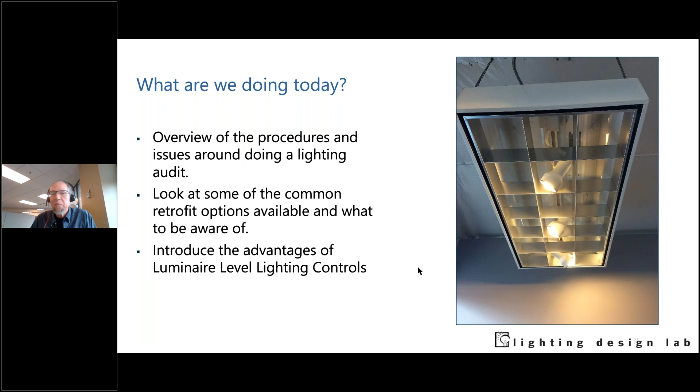All right, so we have our first little pop quiz, and I don't know, Katie, are you going to take over? Do you want me to? No, okay. I'm going to start that. Let's see. Launch. Okay. Eric, do you want to read the options? Yes, and just as an FYI, I don't see it on my screen. I see the green pop quiz, but I don't see the blue. But I think it should be the same.

So yeah, how many of you have done lots of audits and retrofits? Do lighting but want to know more about existing buildings? Are a contractor and want to know more about lighting? Are new to the field and want to know every aspect and thought this was a cooking class.

And we're gonna close it up. And I'm sharing it out, but you can't see the results, Eric? I can see them on a tiny little screen, so it looks. I'll go ahead and let you know. All right.

60% of our attendees currently do lighting, but want to know more about existing buildings. Great. 40% have done lots of audits and retrofits, so maybe we're going to get some good questions.

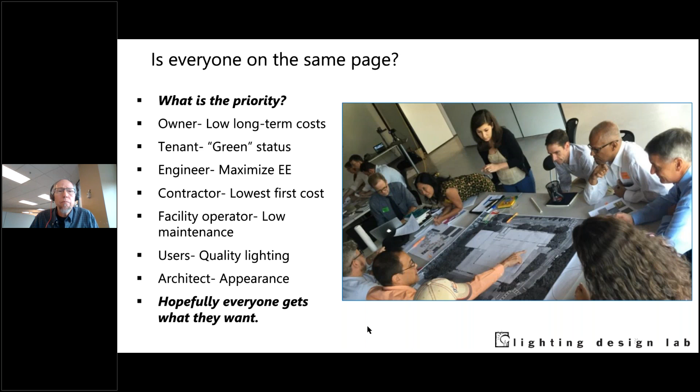So at the beginning of a project, it's always good to go out and do a preliminary survey of some kind. And often we'll get called in, someone's doing a retrofit of a building, and what we hear about first is the hardest part. So if we focused all our energy on what the client is reaching out for, we might think, oh my God, this is going to be an impossible project. But then you go out there and you realize 80% of it is pretty easy. There's just some areas that are going to be difficult. So you don't want to focus all of your effort on that right off the bat.

Another thing that we've seen is sometimes people say, oh, we have to change all the lighting. And maybe they want to say everything's got to be LED, just sort of arbitrarily. And we've seen this on some fairly new facilities, and they might have an area where, yeah, you can change pretty much everything to LED with no problem, but there's a couple spaces that are going to just be really

difficult to retrofit. One thing in particular I'm thinking about is some exterior lighting bollards. Pretty much nothing you could do to retrofit those effectively. So now you're tearing those out and putting in new ones, and that's like 2% of the project, if that. So maybe you say, well, look, let's do everything, and we'll just leave these until they're worn out.

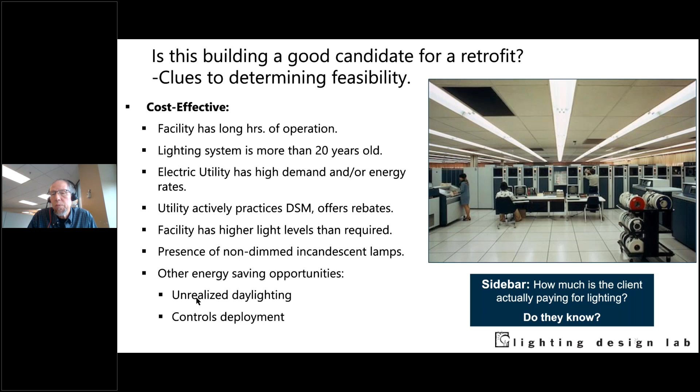Another thing that you want to look at is, are there any opportunities for daylighting? I've walked into spaces and seen skylights that were covered over. Or maybe they should have controls. Maybe people come into the space every hour or two, check some things, and then they go off and do something else. And just for convenience, they leave it lit in between those times. So sensors could be brought on.

Places where it might not be as cost effective: the facility has short hours of operation. We see this in theaters a lot, sometimes churches, where they'll have maybe the sanctuary or presentation space that uses very high wattage light sources, light fixtures, but they're really not on that much. So the wattage savings could be high, but the kilowatt hours would be fairly low on an annual basis.

It may be that it's already a green facility, and so there's not a lot to do. Or maybe it's been retrofitted recently. We see that people say, well, I want to convert to LED, but it was upgraded to modern T8s maybe within the last 10 years. So there'd be some savings, but not very much. Or maybe the energy rates are low. So there's any number of reasons where they could upgrade, they could retrofit, but there might not be a lot of cost savings.

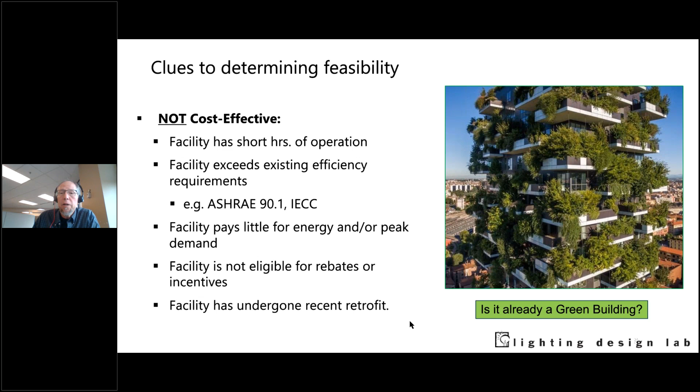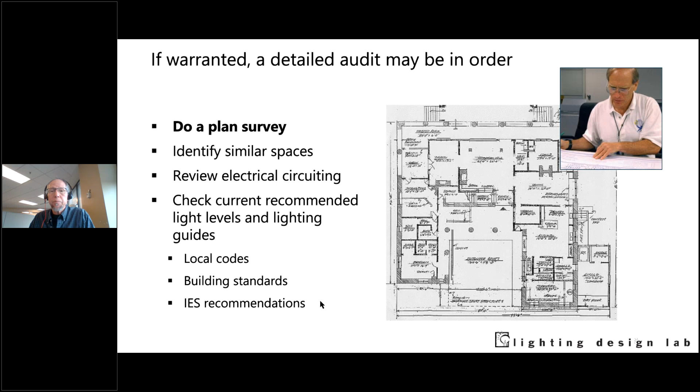Some things you might want to take with you when going out to look at a space: you might want to bring a light meter. I don't really put too much stock in light meters, but sometimes it's good to have them as a point of reference. We'll talk about it a little bit later. Some sort of measuring device, measuring tape, or laser - there's laser measure. One thing I've found is in bright spaces, a warehouse or a gymnasium during the day,

they're not always helpful, and if you're doing exterior during the day, they're almost useless because it's so bright out - you can't see the lasers pointing. So a measuring tape might be good to have with you, especially if you're doing exterior, maybe a 100-footer. How far is it between the poles? Notebooks or a tablet, tape recorder with transcription, camera with a zoom. We'll talk about that in some detail here in a minute. Binoculars can be handy for large spaces.

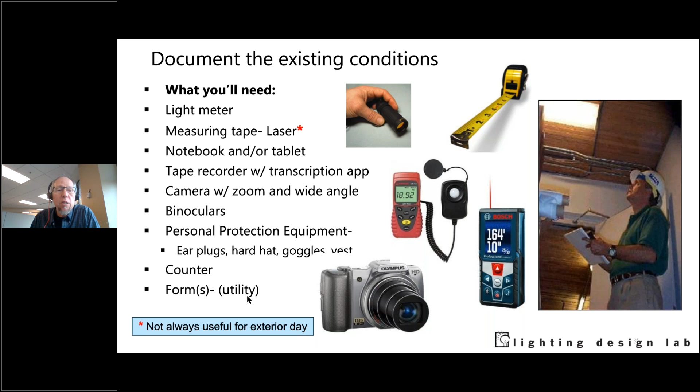Personal protective equipment, a counter so you can easily count and not forget how many lights there really are in that large warehouse or classroom. And then if they're looking for a utility rebate of some kind, it doesn't hurt to have the form with you, so you can get a sense of how that's going to need to be documented. So that's some things you might want to bring.

Then you want to go and document the lighting systems. So again, check light levels - existing doesn't hurt. They may say we want more light, but it's always good to know how much they're currently getting. What types of luminaires, the mounting, the placement.

One thing I've seen sometimes, especially in industrial spaces, is you may have the same fixture mounted lots of different ways. Like it might be mounted - you might have a sort of what they call a wraparound fixture, which is a couple of tubes that have a plastic lens on them, and they could be hanging from the ceiling, mounted to the wall, or mounted directly to the ceiling, but it's really all the same fixture. And so that can make it kind of easy to keep track.

What kind of lamps or light sources do they have? What's the color? Is it consistent? Does it change from one kind of space to the next? And what's the wattage - we'll talk about that too. Ballast types, voltage. What are the daylighting conditions? Could they be improved? Are there any opportunities?

Are the luminaires already retrofitted? A lot of times you'll walk in and say, oh, this space was retrofitted 15 years ago, or 5 years ago, or whatever. And are the as-builts consistent with that? Did they show the retrofit? Usually not. What controls are in place - occupancy sensors, timers, photocells, etc. And then the room reflectances, and we'll talk about that in a minute.

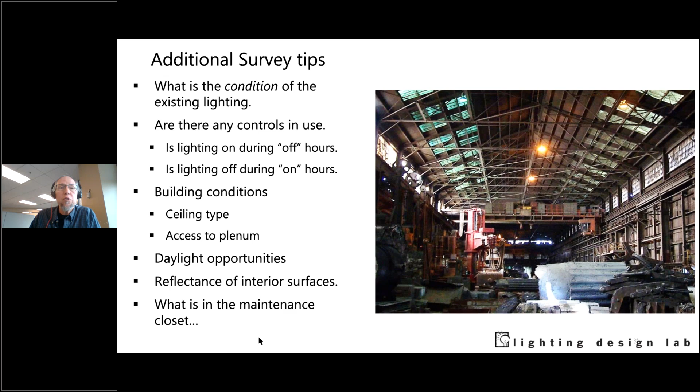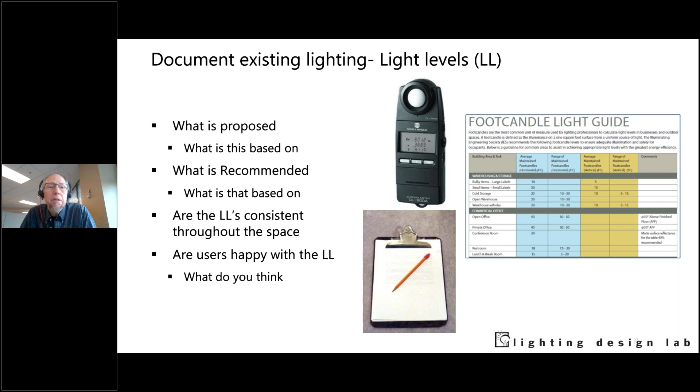So I can zoom in on that label, and get back to the office, and I can tell all kinds of things. I can tell who the manufacturer is, the model number, the wattage, and maybe some bits about a date, like when it was installed or manufactured. So there's lots of things you can get.

If you had to get a ladder, so just on a quick walkthrough, maybe this is preliminary, or maybe it doesn't merit a full-on audit where you'd actually get a lift out, or it might be quite a hassle to get a ladder where you could actually get up there and read that label. So this would just save you some trouble. You could do it with binoculars too, but it doesn't hurt to grab that picture.

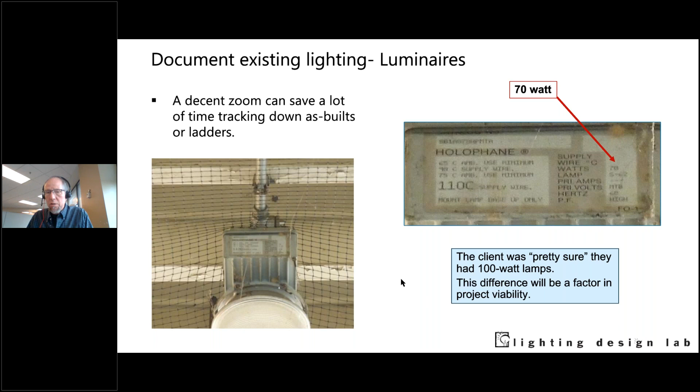The difference could be the difference in how much energy they'll save, and what kind of incentive they might get from the utility based on that energy savings. So it doesn't hurt to have that right with you. Again, getting a ladder out would have been half an hour, if it could have been done at all.

Is the space being lit with indirect luminaires? Most of the light comes up out of the fixture, sometimes you have a bowl-like fixture like in a lobby, or maybe corridors, and it glows a little bit, but you're really not getting much light through that lens. It may be 7%. So most of the light is bouncing off the ceiling. Wall-mounted, not uncommon, and certainly linear pendants.

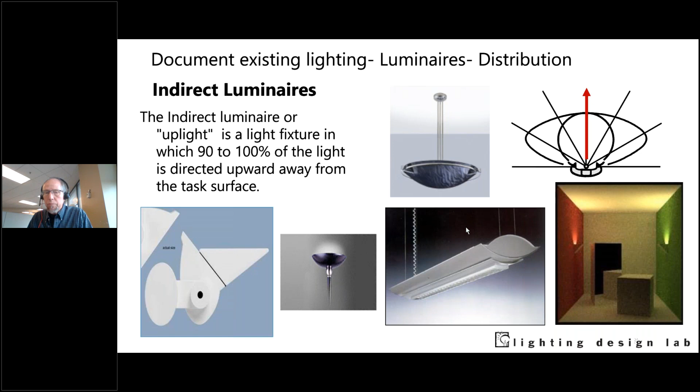Why do we care about this?

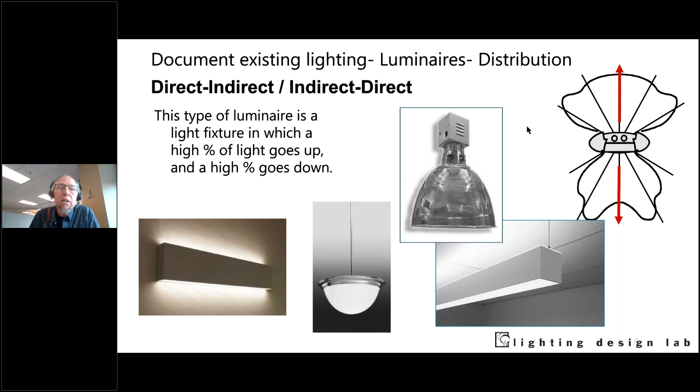It's just a case of, if they say, hey, we're going to take these out and put these in, you can just have that conversation with them. Say, hey, that's a great idea, but you realize you're going to have darker walls, you're going to have pools of light below the fixtures, and they might be like, great, that's exactly what we want. Then everybody's happy.

Beyond just looking at the fixtures, it doesn't hurt to take a couple of them apart. Find some that look typical of what you've got and pop one open. You may find there's worn out components, stuff leaking. Does that mean there's water intrusion from somewhere, or components dripping? Is it superficial, or is the fixture damaged? How are the gaskets? You can tell a lot just by opening up the fixture.

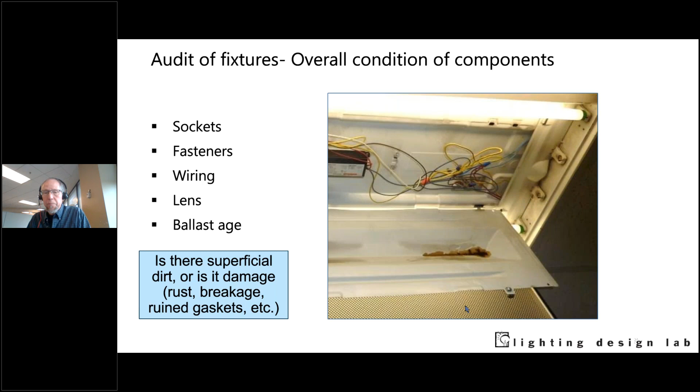Then you want to take a look at some of the electrical components. Do we have 277 volts, or is it 120 volts? How old are the ballasts? This is less of an issue now, but in commercial spaces you'll often see fluorescent lighting being retrofitted. If it's an old facility, a ballast like this, pre-1979, you have to assume it contains PCBs, which requires hazardous waste disposal. If it doesn't say no PCBs, you have to assume it has PCBs. Most newer, modern ballasts will say it right on there.

You still may need to remove them, the utilities often want you to remove the ballasts, and you'll have to dispose of them properly, but it won't necessarily be hazardous waste.

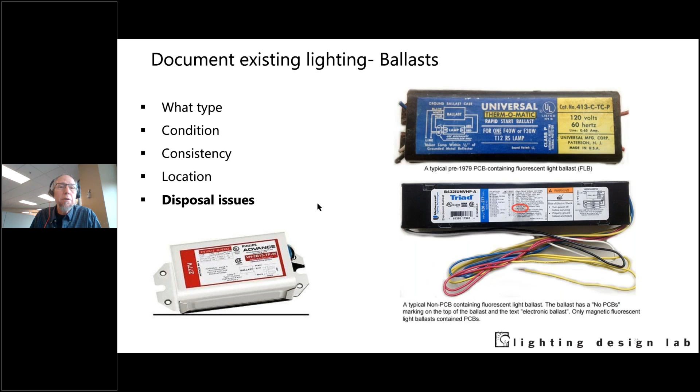Then you want to take a look at the controls. They may have controls on site. It may be that they're substandard and need to be replaced, either because of compatibility issues or because they're not going to be up to current code standards.

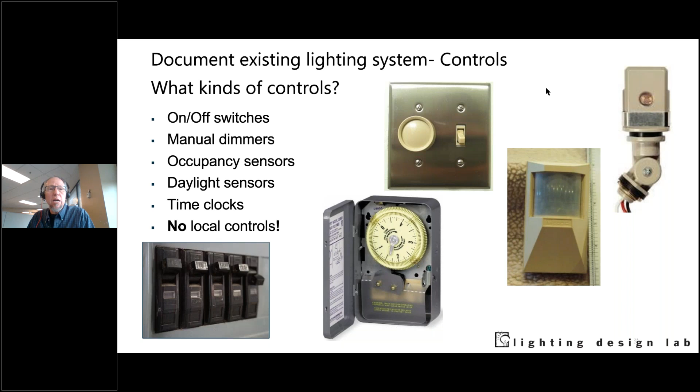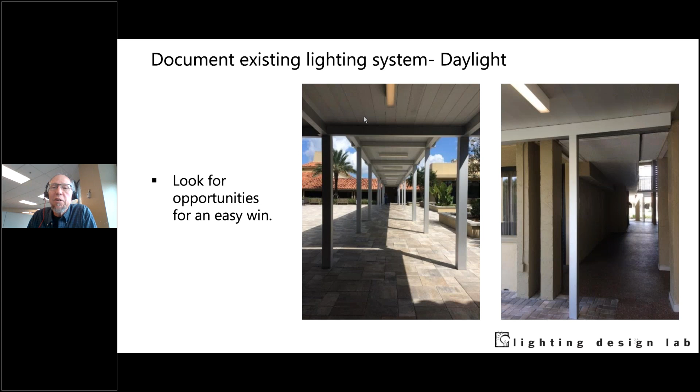What was ironic, I'm always taking pictures when I'm out traveling. So here's this space. When we walk to the end of this, we get into here where we actually might need the light, and the lights are off in here, but they're on out here. It's kind of crazy. So anyway, the lighting, it's a curse.

You want to look at the existing lighting system, and part of that is looking at the room surfaces, because the interior space surfaces are part of the optical environment. Surfaces help mitigate the brightness ratio of luminaires, control contrast, and can add to higher light levels. You might think this seems like interior design, not electrical stuff, but look at how this can help or hurt you.

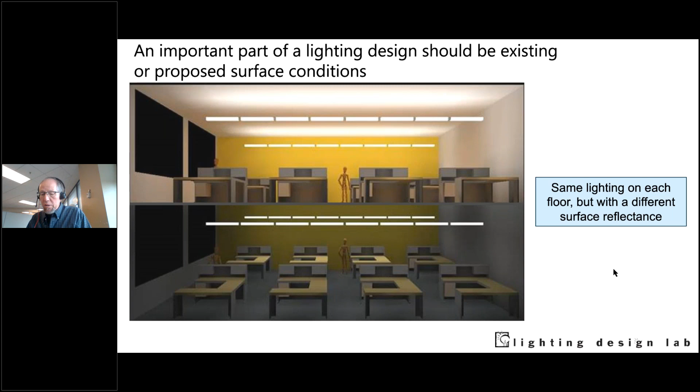Depending on your skill level and involvement with the client, you might actually run a calculation, or maybe you've got software that's easy to use - you just plug in the number of fixtures and a bit of information about them, hit a button, and it tells you how many foot candles you'll get in the space. And you're thinking, wow, magic.

But the typical default surface reflectances on a computer model would be 70% for the ceiling, 50% reflectance for the walls, and 20% reflectance for the floor. So given a certain number of fixtures and the volume of space, I would get about 35 foot candles in this space if I just ran that number.

And then my contrast ratio would be about 10 to 1, 11 to 1 - the brightest spot to the darkest spot.

If I'm actually using a dark ceiling, maybe they're taking out the acoustical tiles and leaving open exposed structure, and they spray it dark blue, or maybe it's wood up there - it could easily be low reflectance. Maybe the walls are low reflectance too, maybe it's brick and they love the look of the brick, that's fine - they want brick, or maybe they're using exposed concrete, and maybe the floor is stained concrete, so it could be low reflectance.

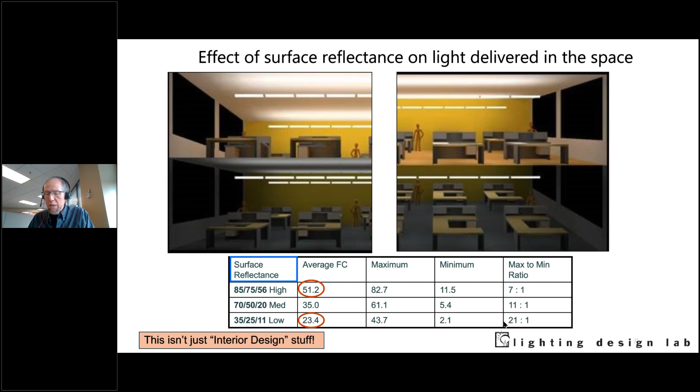Again, we can have low reflectances or high reflectances - it's just free lighting.

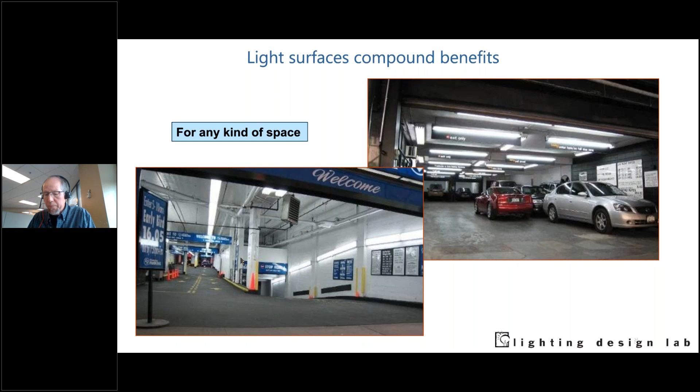So how do you tell what the reflectances are? Well, one way is to have your trusty light meter. You take a light level reading for the light that strikes the wall - hold your meter up, take your reading, then hold it out about a foot from that same surface. In this case I'm right near a window, so I'd probably hold it back a little farther so I wouldn't get too much daylight on the meter, then you get your light bouncing off. Then you do simple calculations - so we've got maybe 80 foot candles striking the wall, 20 foot candles bouncing off, you run the numbers, and you can tell you've got about 75% absorbed light.

Another way to find that out is if they're doing a remodel - you ask, well, what kind of paint are you using? And then it might be like, oh, we're just using off-white.

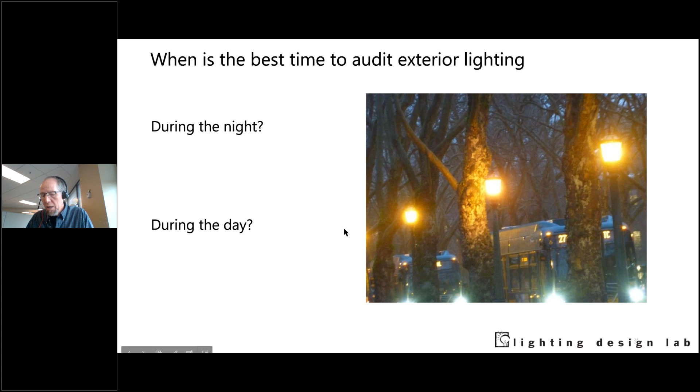So here's another question. When's the best time to audit exterior lighting? During the night or during the day? It seems like a trick question. But you go out there at night and you'll see light, and you might see some things. But if you went out there during the day, you might find this. Wow, we've got lights on all day long, and this one's off. Does that mean it's burned out, or does that mean it's the only one that's being controlled properly?

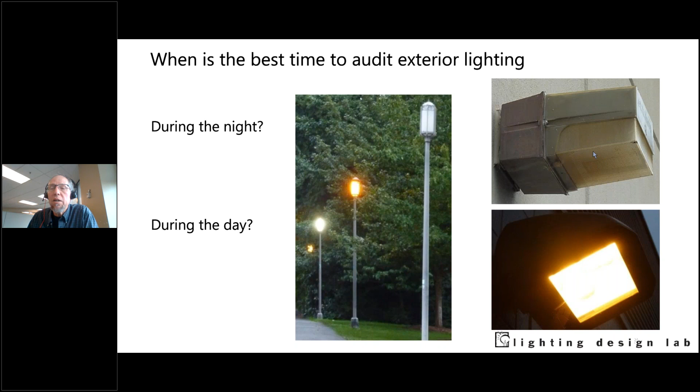Another thing you can tell: if you go out at night, all you see is this bright glowing thing that's hard to look at. During the day, you can say, wow, this lens is really failing. It's yellowed, it needs to be replaced. We're losing 30% of our light on this fixture. So those are things you can tell during the day that you wouldn't necessarily be able to tell at night.

So some other analysis tools that you might want to have in your bag of tricks, or at least know where you can get them if the client asks about it or if you need them, are a luminance meter. So, I mentioned my light meter. This measures illuminance, and that tells us how much light is striking a surface, in foot candles or lux. But luminance measures how much light is coming off of a surface or from a light source.

So someone might be complaining about lenses that are too bright, or maybe there's glare somewhere. Maybe you're doing site lighting and there's light trespass concerns. This will help you look at those lights and see how much light is actually coming off that surface. And we measure that in candelas per meter squared.

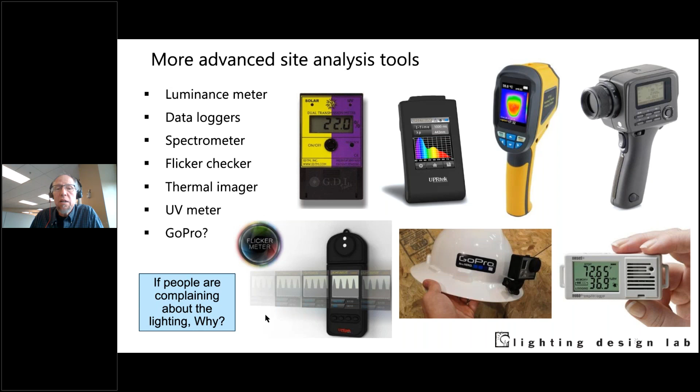Thermal imager: if they're having premature failure of components or systems, you can say, oh yeah, this thing's really getting hot, or you can say, wow, your air conditioning is blowing on that thing constantly. That's why you're not getting good performance. A UV meter. And sometimes people will just wear a GoPro and they can turn that on and off, and they can document the space efficiently.

So we talked about looking at the space; people have ideas about how much light they need, but how much light do you really need?

So one thing you could do in this case, because sometimes the windows just get boarded over, or skylights get boarded over because they don't need them anymore. But now we're seeing things differently. We actually want to bring daylight into spaces, and it's also potentially a free source of lighting energy.

The standards change. So here's a case where we go back to 1972, the IES, the Illuminating Engineering Society Lighting Handbook. So for typical office space, general office reading tasks, they wanted to see 150 foot candles maybe, or 100 foot candles if it was a simpler task, or maybe as low as 70.

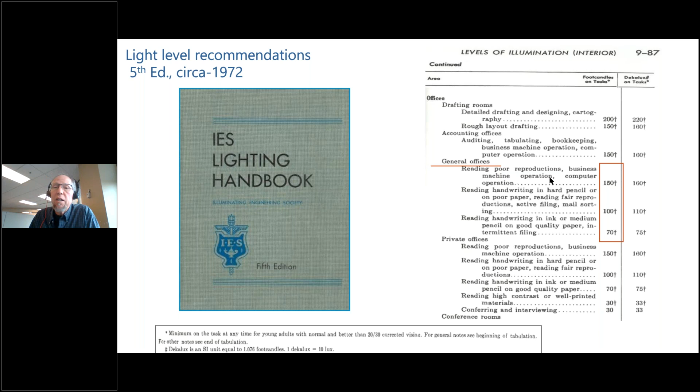What is that? 300, 400, that sounds like it's higher. These are lux. And on the other one, they're foot candles. And so you're thinking, wow, how can I keep track of that? So lux are sort of the new thing. The good news is 300 lux is about 30 foot candles. 400 lux is about 40 foot candles. So we went from maybe as low as 70 down to 30 or 40. That's cutting it about in half, and those are the current recommendations.

So this is where you want to question your client, if they're saying, oh, well, we look at our standards and we need to have, every classroom needs 80 foot candles or whatever it is. And you look back and you see that standard was written back in the 60s. So you want to say, well, this needs to be updated a little bit. And you can show them what the current standards are.

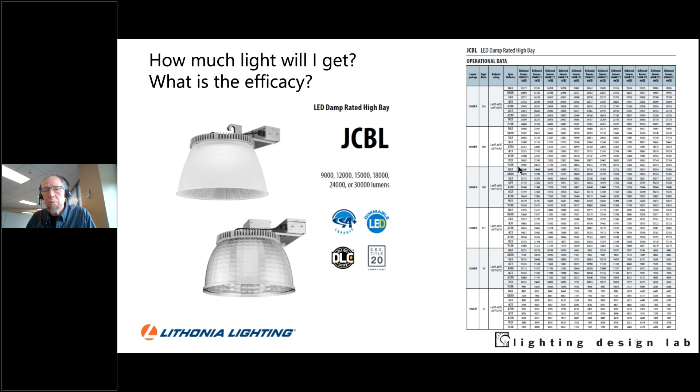So here's a common high bay type fixture, which you might be putting in a gymnasium or industrial facility, but you might see similar kinds of fixtures even in a food court or a big box retail, or a big high volume airport concourse kind of space. And this fixture has all these different possibilities. So we look at the fixture, and we can see it comes in anywhere from 9,000 to 30,000 lumens. Lumens are a quantity of light.

We can have different kinds of reflectors. We can have different kinds of lenses, voltages. In this case, they all come dimmable, but we can have different color temperatures. We'll talk about that in a second, or different color rendering. Again, is it going to be warm light or cool light? Is it going to be good quality or excellent quality?

And depending on which you choose, so our 30,000 nominal lumens, if you look up here, we can get maybe as much as 29,000; I have 28, but it could be as high as 29,000 lumens. So that's pretty much what we would expect. That would be if we have 4,000 kelvins, 70 CRI, color rendering.

But if we picked a different combination, maybe we want something warmer with higher quality, we're down to 19,000 lumens, maybe almost 20,000, 19,700. So that's a big change. It's a lot less light. Almost the same fixture. So we've got to be careful how we specify.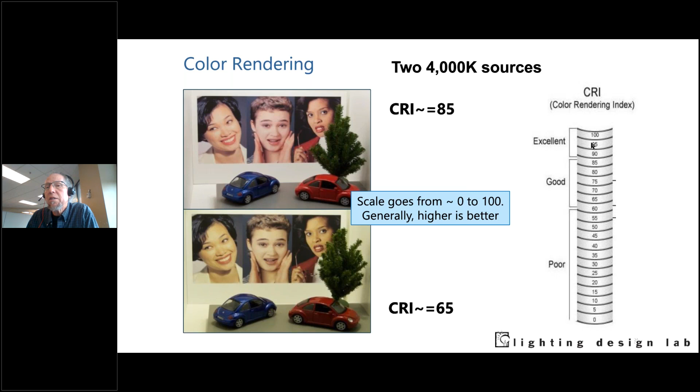So color rendering: here's one that's 85 color rendering index, 65, pretty mediocre. The good news is most LEDs generally come at least 70, and sometimes they can get all the way up into the high 90s. There's a cost for that, and I'll try to tell you that you don't always need this highest quality for every case.

So if we're lighting, say, a parking garage or even a warehouse, 4,000 kelvins is sort of a neutral cool, might be a very appropriate color. 70 CRI is good quality. It's not excellent, but it's probably good enough so that complexions look good, and we can easily identify different colors of boxes or materials, and do the job quickly and efficiently.

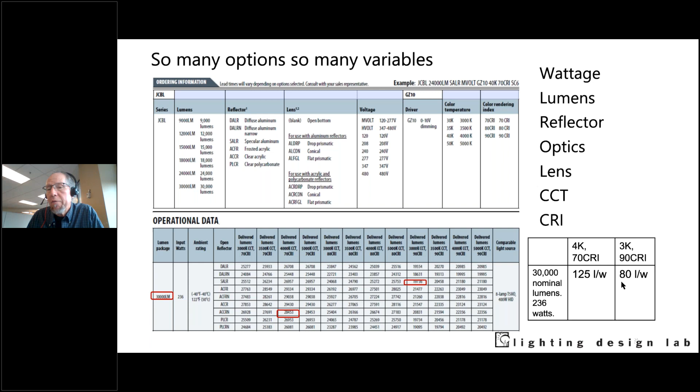Here we've got the lumens per watt. There's 125 for the 4,000 Kelvin, 70 CRI, but for the 3,000 Kelvin, 90 CRI, it's only 80 lumens per watt. That's still a big number, but just know that. Plus, you might think, well, maybe this is better, but if I put it in a warehouse, I'm maybe not getting the benefit. And I'm going to spend more money, and I'm going to have to put in more fixtures and more energy.

Someone said not long ago, isn't lighting getting easier? It's just LEDs now. These are all the possible combinations I could get. Actually, there was more with just that one fixture. So if I'm running a model, I wouldn't use all of these, but I could. It'd be crazy. All right, another quiz.

You want to open this one up? I mean, you want me to? Okay. Yes. Yeah. No, just the quiz. Let's just look at it. Okay. There we go. It's open. Thank you, Katie.

Okay, so what are the benefits of light interior surfaces? Potential to save energy, improve visual comfort, lower contrast ratios, potential higher light levels. And isn't this just interior design, not my area? So how many of these do you think would be the proper answer? Right, you could pick more than one on this one, right? Yes, we want you to pick more than one. So if you only picked one, you just got a hint. Go back and pick another one. Yeah.

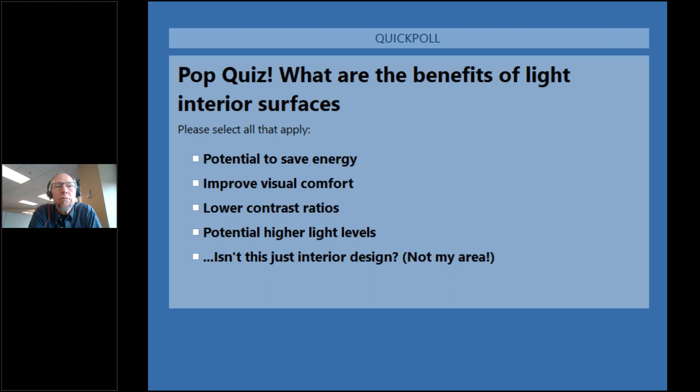All right, give it 5 more seconds. 3, 2, 1, close. And here are the results. Excellent, okay.

So certainly potential to save energy. Now, admittedly, you'd only save energy if you acted on the fact that you could get higher light levels and maybe use less energy, less fixtures or lower wattage. Improve visual comfort, yes. Lower contrast ratios would be true. If you have light surfaces, you don't have as much contrast between the brightest and darkest, so some people miss that one. And the potential for higher light levels, again. And then the interior design, yes, no one fell for that one. So we've made some progress.

All right, so common retrofit applications. We're going to look at fixtures that are commonly retrofitted and talk about them briefly. So we have the troffer, 2x4 troffer or 2x2, recessed cans, decorative fixtures, high bay type fixtures, and exterior.

So discussion for troffer retrofits always comes around to so-called TLEDs, tubular LEDs. People want to retrofit to LED. They take out their old fluorescent and look at, here's this product that looks a lot like the fluorescent they took out. And guess what? It's got LEDs. So it's great. I'm moving into the modern age. But you know, you're going to find I'm not a big fan of these.

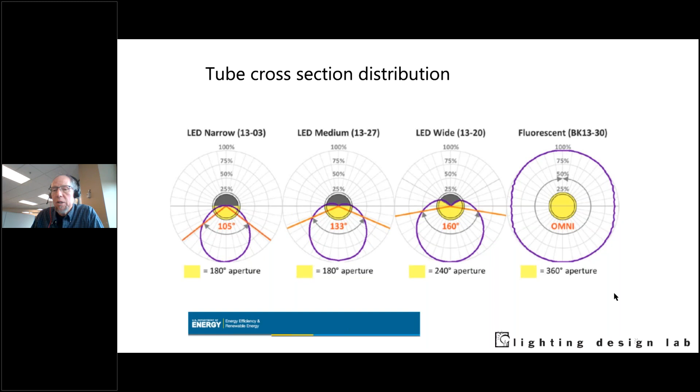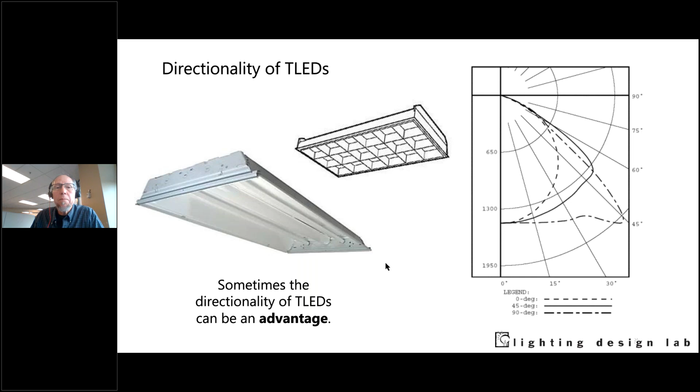That's not always a problem, especially if I'm retrofitting a direct luminaire or troffer. Usually I want to just push that light down, so it could be okay. But if I'm retrofitting a luminaire that has indirect and direct light, I'm going to have to choose which one I want. And it's going to affect the lighting in the space, and it's probably not going to be a happy solution. So that's the optics.

Now we get into the wiring. It seems like it used to be simple, right? I take out my fluorescent tube and put this thing in. Well, there's 3 basic kinds of TLEDs. Ones that in theory require no rewiring, ballast compatible - we call this UL type A. Ones where you have to rewire the fixture and disconnect the ballast - we call these UL type B. Another way you rewire the fixture, but the driver is not inside that tube, it's separate - we call that UL type C.

And then at some point we have to ask, when does a tube replacement become a kit? And this would be important, particularly if people are looking for a rebate from a utility.

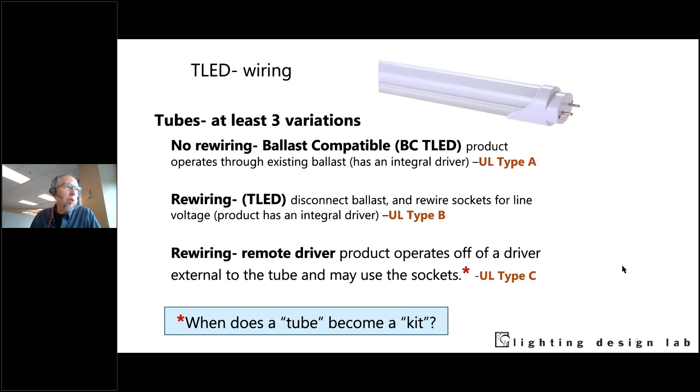Here's a case where you rewire. So then you say, okay, this is too much trouble, I'm just going to disconnect the ballasts, and then I don't have to worry about compatibility, which is true. That eliminates the concern. Most include an integral driver built into the tube, and are powered directly by the mains as they come into the fixture.

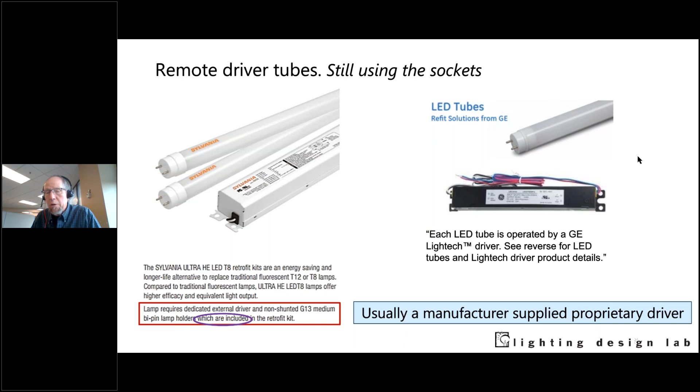Now we have remote drivers, still considered tubes because they get power from the sockets. But the good news is, sometimes when you're buying the TLEDs, you buy this little driver that looks just like the ballast you took out. The screws are in, everything's mounted, same size, so that's pretty good. It's usually included and usually supplied by the manufacturer, so that eliminates compatibility issues, but it is more rewiring.

Here's a case where remote driver tubes are using the sockets, but there's no power to them. So our power comes in from the line voltage or the AC, goes into this little driver that we stick on somewhere in the fixture, and now we have modified low voltage DC wiring coming out directly into the back of this LED. You can see a little socket there, and there's our tube. So it's using the sockets only as a lamp holder, just to hold it in space. The power comes in somewhere else.

We're seeing all kinds of configurations. This may or may not be allowed.

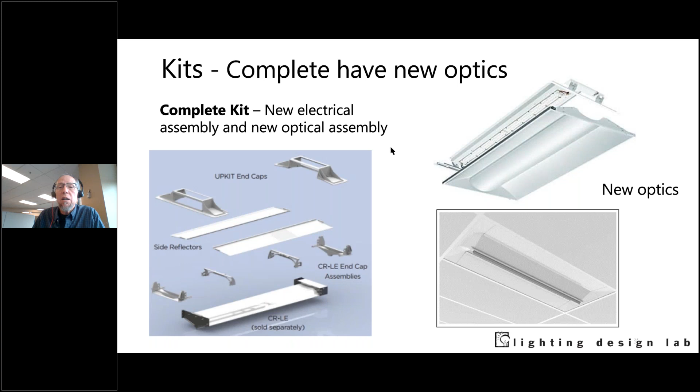One thing though that you might want to think about is maybe they want new lighting. If they're getting all new carpeting, all new furniture, painting, everything, maybe they don't want the same old lighting — maybe they want a different kind of lighting.

Here they have these troffers. They look pretty good, but once you change everything, they're going to look pretty sorry. So that could be time to have that conversation.

Here's another case where decorative fixtures, you have these in hospitality, apartment buildings, hotels, hundreds of these in a building. So in this case, maybe we've got 4 compact fluorescents in there. You're looking at the lumens, they're 1,800 lumens each, so you add that up, it's 7,200 lumens.

Here comes these LED fixtures. Well, this one's got 2,500 lumens, and this one's got, say, 2,000 lumens. Well, how are they going to possibly be able to compete with this 7,200?

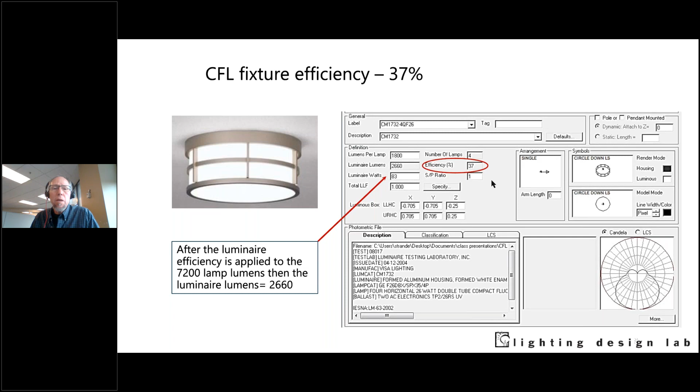But if you look at the efficiency of this decorative luminaire, the efficiency is 37%. That means less than 40% of the light makes it out of that fixture. Most of the light from those lamps is absorbed in that system. So really, we're looking at closer to 2,600 lumens.

And we see fixture A, we'll call it, this our other one, had the 2,500 lumens, but those were source lumens. They didn't do the photometric file for this fixture. They just said, okay, here's an LED chip, we're putting in LEDs in this fixture, and it's going to give us 2,500 lumens. We don't know what's going to happen once it gets out of the fixture, but if this fixture is anything like the other fixture, we're not going to get most of that light out.

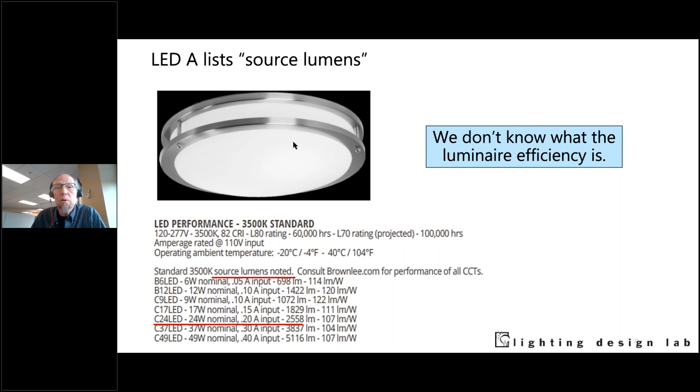Whereas the one, LED B, that we looked at, that only had maybe less than 2,000 lumens, those are delivered lumens. So they ran a photometric on this. They did put it in the laboratory, measured the light coming out of the fixture. So this is actually one that's going to be pretty close to what we were looking for.

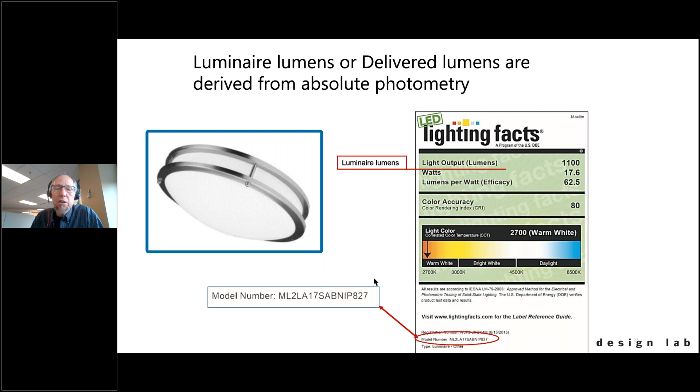So you have to look at the luminaire efficiency and light output in lumens, and that's what you'll get if you make any changes. If you say, well, we don't like this white lens, we want an amber lens, you need to then get a different photometric file. And you can't always just look at the lumens of your light source.

So we have center beam candle power coming out at the middle, and when the light drops off to 50%, that is our beam angle. And that's the number that we're concerned with often.

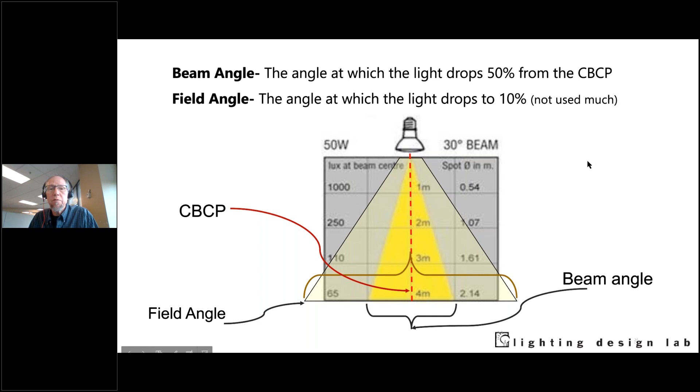Whereas, so we can see how this works in the field. So here's our recessed can looking up in there, a couple of compact fluorescents. We have a hole in there to let some of the heat out because they're temperature sensitive. If I stick my head up in the plenum, look above the fixture at the housing, I see a lot of light. Wow, where's this light coming from?

I'll tell you where it's coming from. It's coming from these lamps. It's light that's not going into the space where I want it. It's going, there's so much light up here, I can read the label quite easily. So that's all just wasted energy, wasted light.

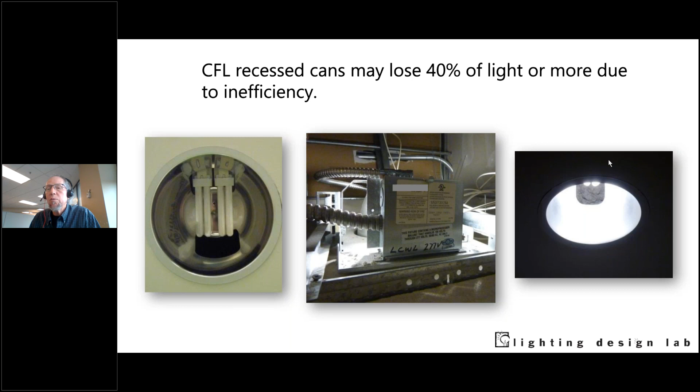So that's where I can take an omnidirectional source and put in a directional LED, and maybe I can take out 26 watts and go to 13 watts and get a lot of savings and still maybe get more light than I had.

The problem with these, these are LED replacements for compact fluorescent. In theory, you could just take out your compact fluorescent and pop these in. But there are, of course, some caveats. Would that it was that simple.

Simply plug the replacement lamp into the existing ballast. Okay, let's see what happens. First I have to look at a compatibility chart. So here's my product, and I have to get into the fixture, open it up, and see what ballast is on there. I have this SmartMate ICF, and here it is, the Advance SmartMate.

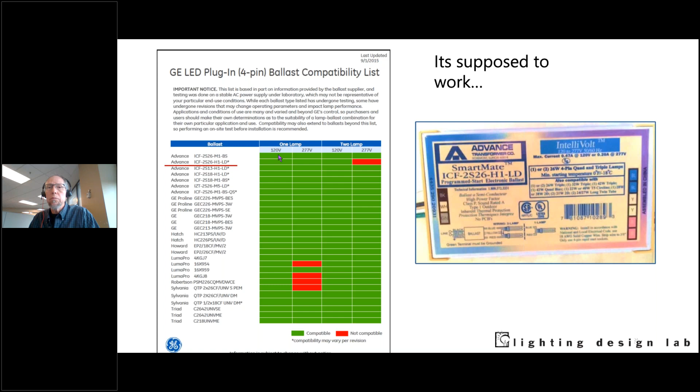So it looks like it's compatible, except in one condition. But we don't have that. We've got, say, two lamp, 120 volt, and then we go to try it out.

We check, but then we look. Then it says, read the fine print. It doesn't work. While each ballast type listed has undergone testing, some have undergone revisions that may have changed the operating parameters. So performing an on-site test before installation is recommended. Well, I did an on-site test and it didn't work.

Here's another one. Here's a product that says, here's the large print: compatible with most fluorescent ballasts, with a little asterisk there. If I go down and look at that, it says for maintenance and energy savings reasons, this company recommends bypassing all ballasts for permanent operation.

So if your plan was to do this retrofit for just temporary, just a couple of weeks and then go back to what you had, this would work. But I don't think most of us are doing that. We want to do a permanent retrofit. So what they're saying is, even though they say it's compatible, actually you should bypass the ballast. And that's a lot of work for each little recessed can.

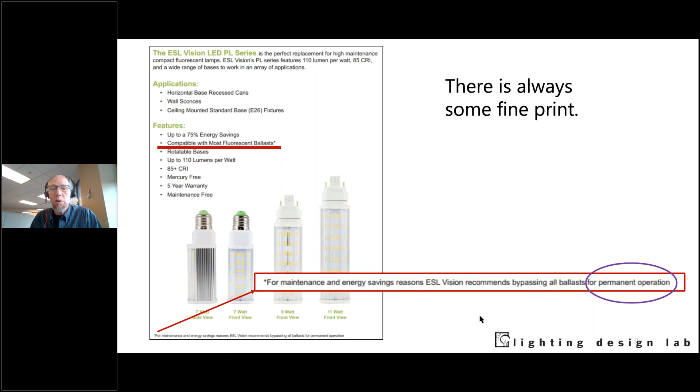So then we see these kits where you don't have to take out all the guts yourself — you leave the housing in place, and you just take out the lamps, the holders, everything. Just either plug in your power or screw this thing in if it was incandescent, and you pop this up, and now you've got your LED retrofit.

All right, discharge. Only 2% of sockets out there in the lighting world are high intensity discharge, and about 6% of lighting energy — and that's based on, I think, 2010 data, so things have changed a little bit. But the point of the story is that most of these are either 400 watt, 1,000 watt, maybe 250 — very high wattage. So there's a lot of potential energy savings out there.

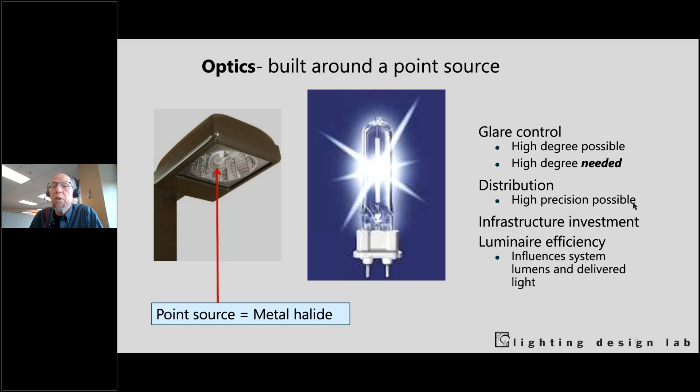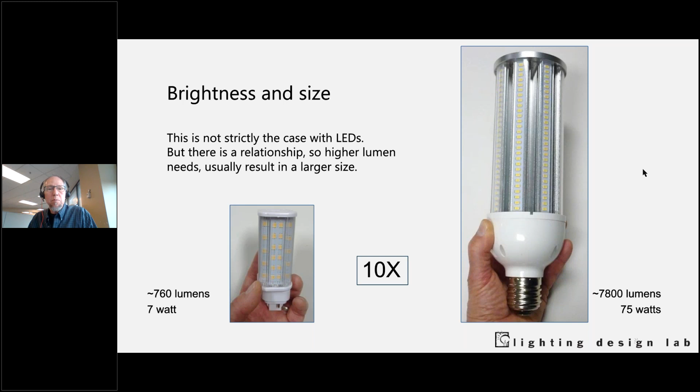But LEDs are a little different. They come in arrays. So here's our 7 watt, 760 lumens. But if I need more light, I need a lot more LEDs — it's a lot bigger. So just keep that in mind; the size restrictions can be an issue.

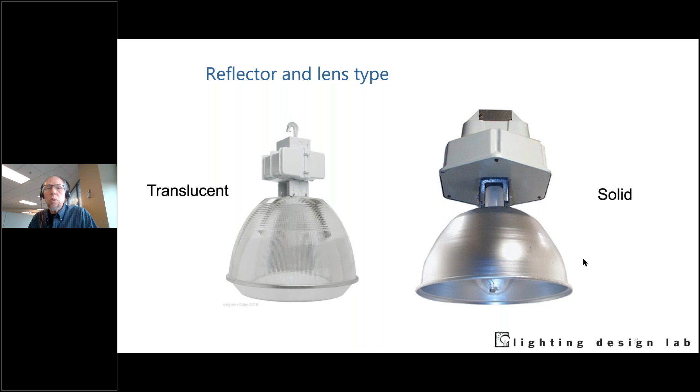But sometimes you want that light to come out in all directions. So here we have a translucent prism, and here we have a solid aluminum reflector. There's a big box retailer that's very particular about how the light comes off of their fixtures. They like the sparkle and may not find this acceptable. It may be fine in many applications, but you don't want to be surprised — you don't want to spend an entire weekend retrofitting a big store and then have the client come in Monday morning and tell you that you have to change all 400 fixtures.

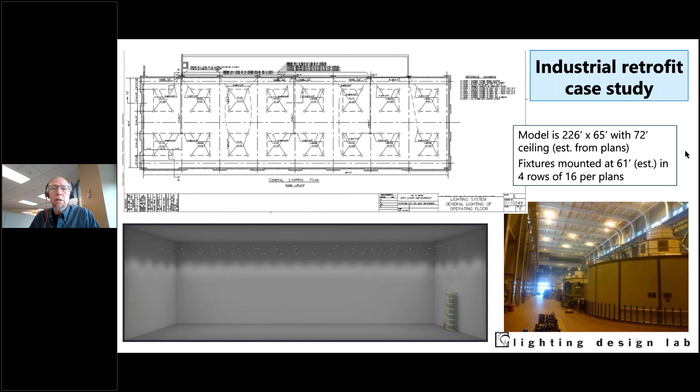So first we had to model the lighting and get a sense of what they were starting with if they had all new lamps in the fixtures. What was their power? They had about 400 watts per fixture, 465. They should be getting close to 30 foot candles, and their lighting power density was 2 watts per square foot, with 64 fixtures.

So the proposal was to put this retrofit in there. They were going to go down to 160 watts, get 35 foot candles, modeled down to 0.7 watts per square foot. So this looks like a big win - they get more light, less power. Let's pop the champagne corks.

But one thing to be aware of with this particular retrofit is you have to go up there and bypass the ballast. They had to send somebody up 72 feet in the air, tinker with the fixture, bypass the ballast, or drop it down and have it rewired on the floor, then send it back up. However that was going to go, it's a lot of work - we're not just taking out one bulb and screwing in another. This is a ballast bypass.

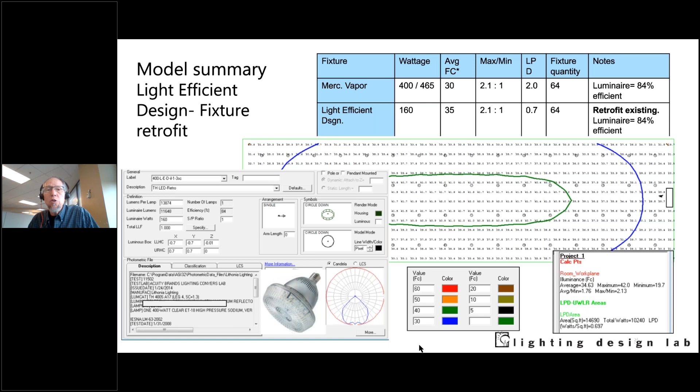So what else could we do? What if we just put in new fixtures, like a real LED fixture? In this case, they used 227 watts. We got a whopping 80 foot candles, and we're at 1 watt per square foot. So we're cutting the power by half, but more than doubling the light, which seems excessive.

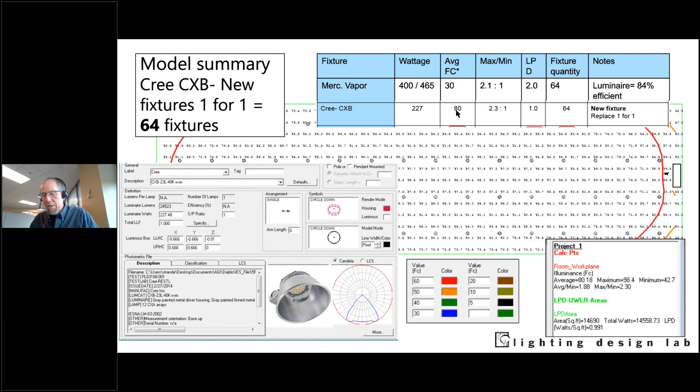So what if we did that same fixture, but instead of putting in 64, we put in 34, because they had kind of a lot to begin with? We get 42 foot candles, now we're down at 0.5 watts per square foot. We went from 0.7 in their retrofit, but we could cut it even less - we buy a lot less fixtures.

By the way, these retrofits at that time, the screw-ins were $300 a piece. So it was real money for those things, and they still had to go up there and rewire. Whereas with this one, they'd just go up and cut down the existing fixtures and put up a new one, but they were buying half of them. So anyway, it doesn't hurt to look a little more closely at any given measure.

Okay, here's a pop quiz. I think in the interest of time, I'm just going to go through this one.

Before doing an LED lamp-only retrofit, always check: that the fixture's in good shape, yes; that the lamp is compatible with electronic ballasts and controls, yes; that the optics are appropriate - doesn't mean you could change them, but maybe they're changing for the better; that the utility is agreeable, since not all fixtures are going to be acceptable if they're looking at an incentive; and that the customer has enough money. Of course, that should be a primary - no, well, you need to look at the cost.

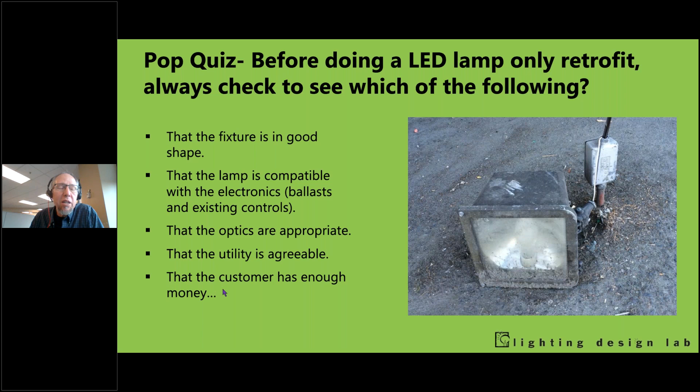All right, now for the part you've all been waiting for: the Luminaire level lighting control and network lighting control portion of the presentation.

So the Luminaire level lighting controls are a great option for retrofits. It can make it really easy to come in and incorporate all the control strategies in one spot. So why do we use controls at all? Well, it saves energy and saves on maintenance costs.

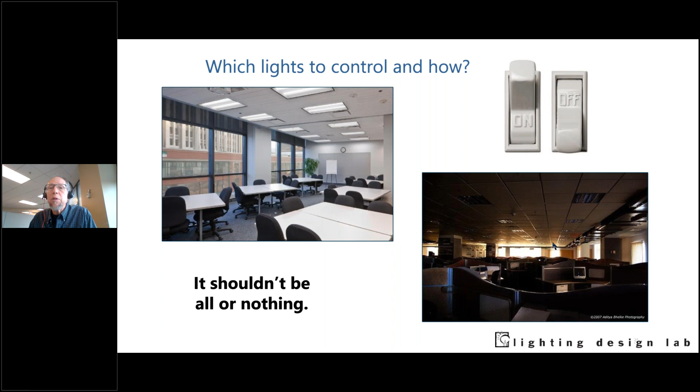So for years we've had sort of the light switch: the lights are on or they're off, and that's controls, but it's kind of a blunt instrument. It may be all you need, but there's possibly better ways to do it. So we look at this space. We've got an occupancy sensor in here, so when someone walks in the room, the lights come on.

So here we have the space is occupied, but all the lights are on full blast. That may not be the most elegant solution. By the same token, we've got only one person working here, and they've got one little pool of light. Let's just say this isn't the best solution either. There's all kinds of reasons why this isn't a great scenario. So what else can we do?

And we're able to change the lighting based on the intensity that we want. We can have more light or less light depending on what's going on. We have different occupancy conditions that may drive how we're changing the light. Daylighting conditions are changing, and that may drive that preference. So some people maybe want a certain amount of light, others want different. And then depending on the nature of the task that we're doing. So all these things could dictate how much light and what kind of light we want.

And the controls that we deploy are varied now, although similar to what we've had before. Sometimes the lights just come on or off. Sometimes we manually control the light level. We have occupancy sensors, daylight sensors, and then time clocks where the lights are turned on and off automatically.

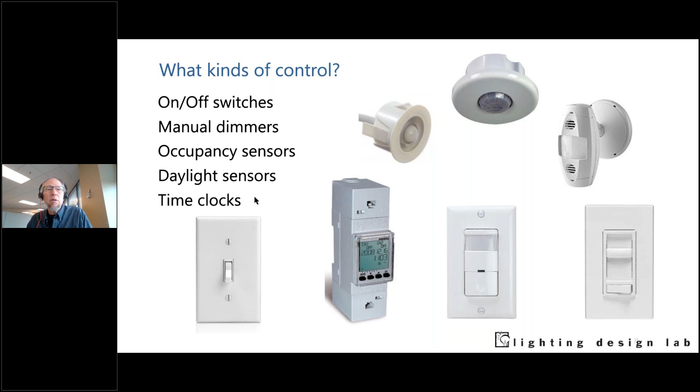We first have to get into programming mode. We push the button maybe 5 times if we want a 10-minute delay, and then if we want to change something else, we have to go to a different setting mode, and then we maybe hit the button 9 times. It's complicated. We're doing all this pressing the button, and then it'll start flashing to indicate that it's accepted it.

Doing all this while the painters are running around, carpets being installed, punch list is happening, possibly a very busy environment, and we're maybe doing it in room after room, space after space, and it's just not a great way to go.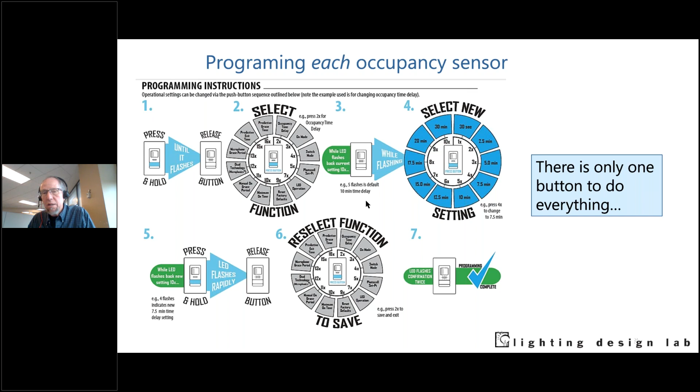So sometimes we have what's called self-programming. That's the goal, right? And here's a case where we just put the lights in, we go in with a little handheld device or maybe our tablet, we push a button and it programs itself. And that actually works pretty good. I've seen it done. As long as we don't have any hiccups, it works pretty well.

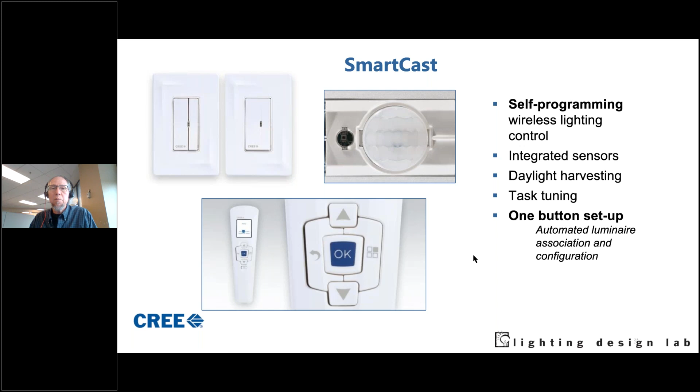But if you have to get in and change anything, it can be a little bit tricky, especially when your interface is like this. We're used to now having interfaces that are a little bit more user-friendly, a little more intuitive, and it can be on a phone or maybe a tablet or something like that.

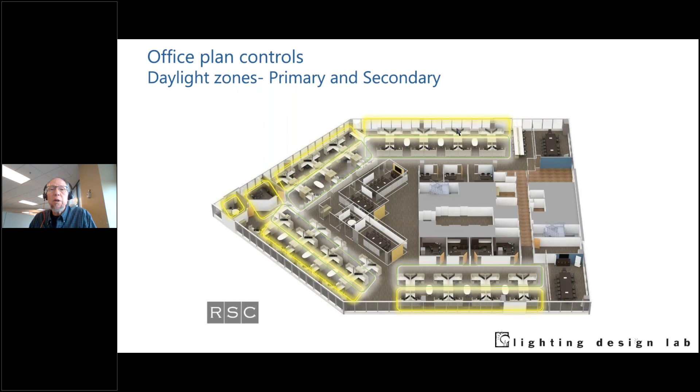Another reason we use controls is because code requires it, right? So we've got lighting controls, daylight responsive controls, mandatory in many kinds of spaces. And so here's an office floor, and we're used to having a daylight zone a certain distance from the windows, but now we've actually got primary and secondary daylight zones, and different things happen in those zones.

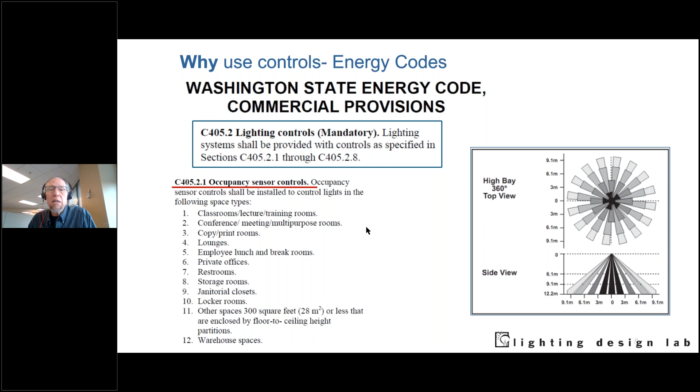Occupancy sensors. We're used to occupancy in spaces, conference rooms, restrooms, different little individual offices, but now we're actually required to have occupancy throughout pretty much the whole area. We've got egress lighting that we want to be aware of. Maybe certain lights need to do certain things on off hours or when there's an unsafe condition. So the lights are required to have egress lighting.

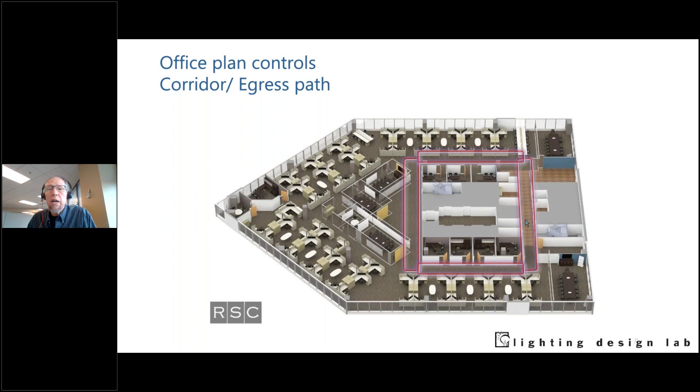And we layer all that together and we get a fairly complex controls situation between the daylighting, the occupancy, the egress lighting. So when we look at a space and you're trying to determine the controls and what's happening with the controls: we walk in, the room is empty, the lights are on. We know that's not good.

The room is empty, the lights are off, but there's lots of daylight. That's pretty good, but what happens when the room is occupied? Someone walks in, do the lights just come on anyway? Be good to find out. Well, ideally what we'd have is if we have a daylit space, someone's in the room, but the lights are off. That's a success, assuming the daylighting is appropriate. And so we look at all these controls.

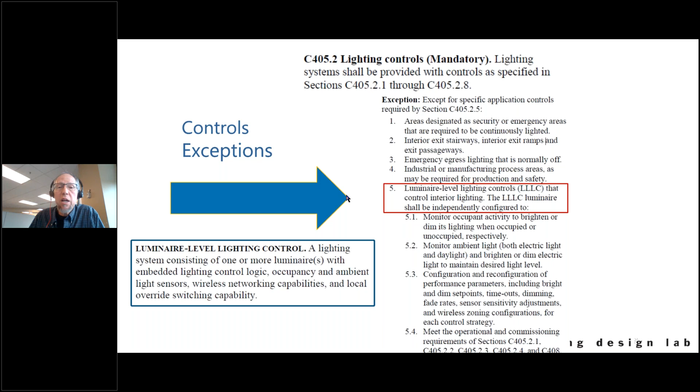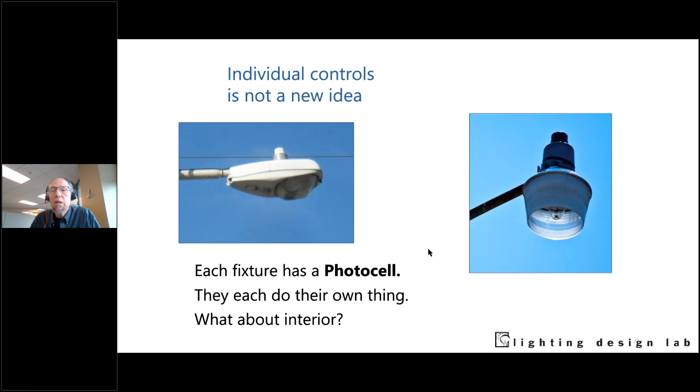There is an exception in the code for luminaire level lighting controls. We don't have to worry about any of that stuff if we're using those kinds of fixtures. And luminaire level lighting controls, what are they? Well, each fixture has its own control. That could never happen. But we're used to it in some settings. We have exterior lighting. It often has a little photo cell on every fixture.

We've also started seeing it in high bay applications, especially back when we had the high output fluorescents, we could start putting control devices on those. We couldn't in the past because metal halides or high intensity discharge didn't really start and stop very well, and they certainly couldn't dim very well. So for industrial spaces, it can work pretty well because we've got relatively few high wattage fixtures. So putting a sensor on there

makes sense. You get into an office and you've got lots of fairly low wattage fixtures. Putting sensors on all of those, the fixture density is a lot higher. So it never quite made sense. So a lot of things have come together lately, in the last 10, 15 years, to make luminaire level lighting controls viable. One is miniaturization of control devices. We have these controls that are very small now. We have controllable light sources. We could dim fluorescent, but dimming LEDs is a lot easier.

Higher bandwidth. So when we tried to have network systems, they could work in smaller areas, but to try to do a whole building, it just didn't have the bandwidth to control all that data. And then, of course, we have more demanding energy codes, so we're required to do it in a lot of places. So it makes it easier to do it.

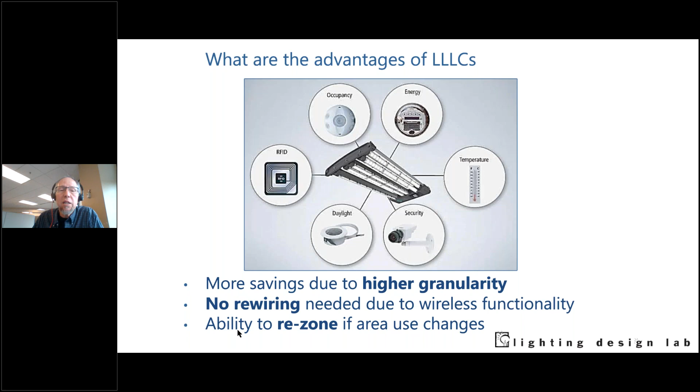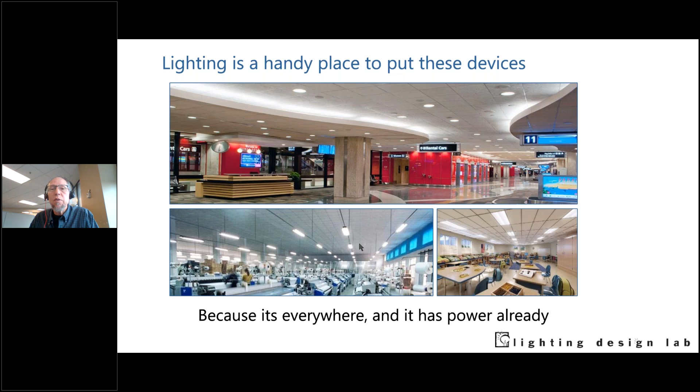Why do we have all this on lighting? Well, one reason is because lighting is a handy place to put all these controls. It's above where we are. It's in almost every space that's occupied by people, and it already has power to it. So we can put all kinds of other controls on there. And so let's take a look at what this might look like from a practical standpoint. So here's another pretty large floor plate, and we'll look at what happens with some traffic patterns.

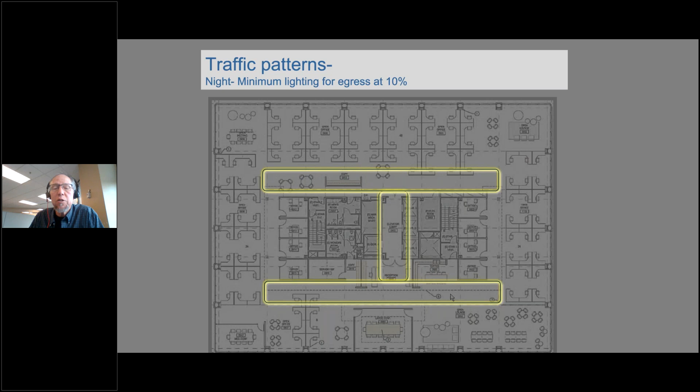So let's say it's nighttime and the space is mostly or completely unoccupied. And we just want to have a little bit of light for egress, because we feel like it's a good idea, and the fire marshal is happy about it, and everybody's happy about a little 10% of light in just some of the fixtures. And so an early bird arrives while it's still dark out.

So someone comes off the elevator, and the lights in the traffic in this area go up to 90%. So he comes off the elevator and goes this way. These are on 90%. All these other lights come up to 30%. So the person isn't in a dark space. There's a little bit of light all around, so they can kind of see a little bit. It's not so creepy, but the areas where they actually are are lit to 90%.

They go over to their desk, and this little zone is still lit to 90%. It's possible that over time this light will go down to 30% along with the other ones. You could program it so this corridor would stay lit to 90% the whole time if you wanted.

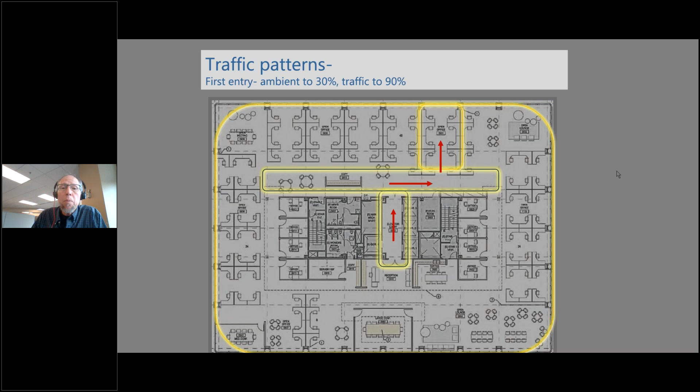So now somebody else comes. Now it's daytime. So we've got our daylight zone, and each fixture in this daylight perimeter has turned itself off. But these lights are all still at 30%, and someone else has arrived, and our person's still working away, and their light is at 90%. These are 90%, 90%, 90%, because they're outside the daylight zone, and maybe it's summertime.

And so we're maybe lightly populated on this floor. Not a lot of people are in. A lot of people are on vacation, so we got people working in each of these areas. It's 90%. We've got daylight coming in. Those areas don't really need any light. Maybe there's a conference room and they've shut the blinds, so these lights come up to 90%. They're doing something with a screen, let's say. So you can see how you get all this really granular control of the lighting.

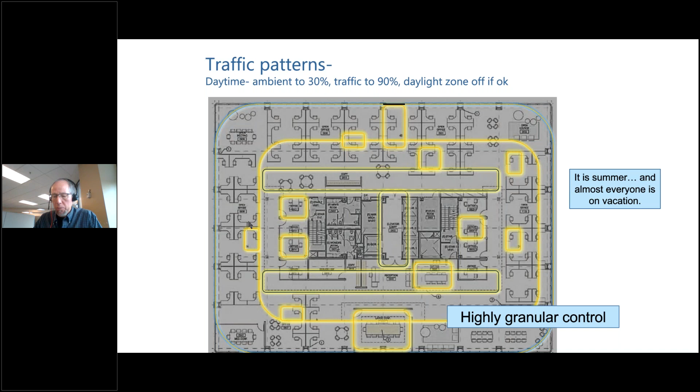All the lights don't actually go off completely, but they glow a little, so that it doesn't look spotty. Or you can set it up however you like when you program it. So there we go.

Okay, people are voting. Excellent. They're quick this time. Oh yeah. Well, this one should be easy.